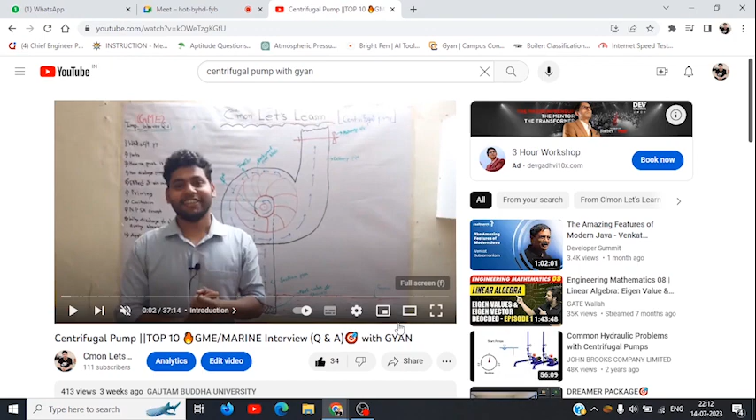So guys, we were talking about the NPSH concept, and he was confused about what he should understand, but he is facing a little problem - what he will say to the interviewer so that he will be satisfied. Is it, Vibin? Yes bro, okay, no worries.

Here in this section, after method of priming, I have explained what is cavitation, why it happens, what is vapor pressure, and the concept of boiling. Now Vibin, once again, what is cavitation?

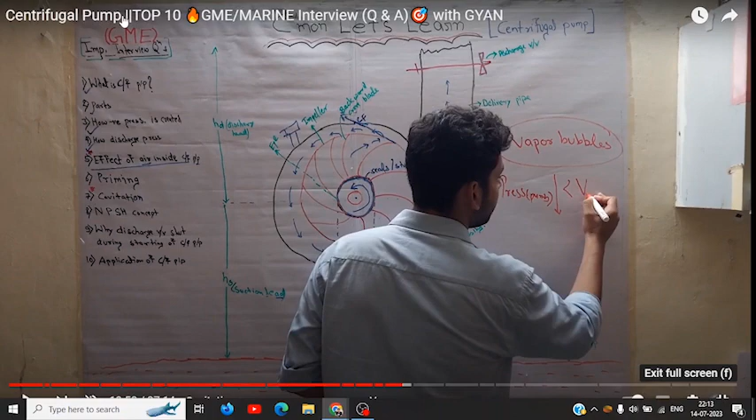Cavitation means the formation of vapor bubbles, due to when the pressure of the pump gets below the vapor pressure of the liquid which is being pumped. So at that time the vapor bubbles start to form. Correct, very correct, okay.

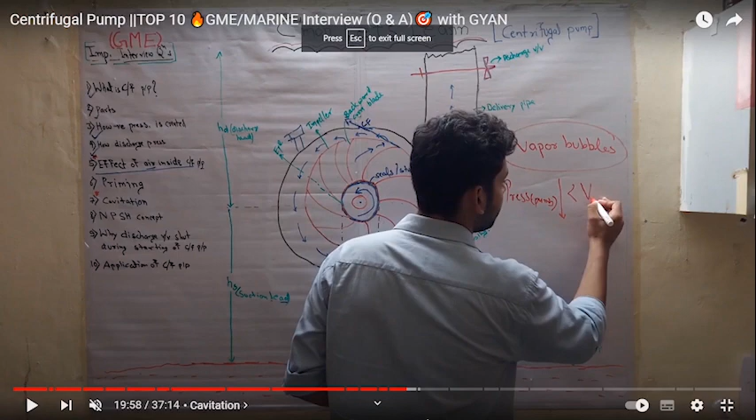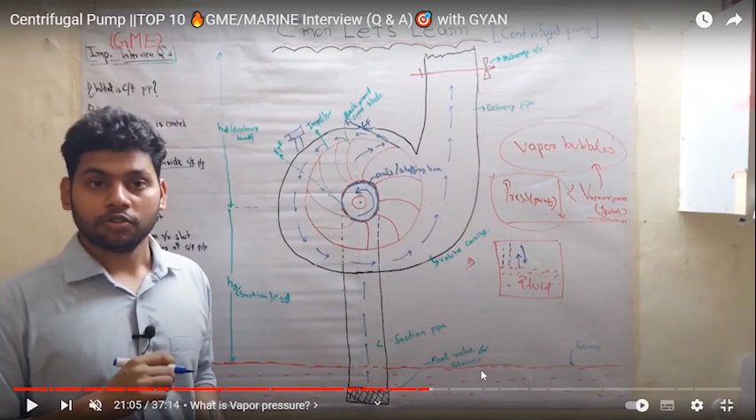In that, you just said the vapor pressure of the fluid gets more than the pressure in the pump, or pressure in the pump got lower than the vapor pressure of the fluid. So what is vapor pressure of fluid, can you tell me? The vapor pressure means the force which is exerted by the vapor state when we are boiling it or heating it.

Okay, means when we heat the liquid, or when there is a liquid, there is always evaporation and condensation, because evaporation doesn't only happen at boiling point. It can happen at any temperature. If you heat it, the vapor formation becomes more. Yes bro, okay, all right.

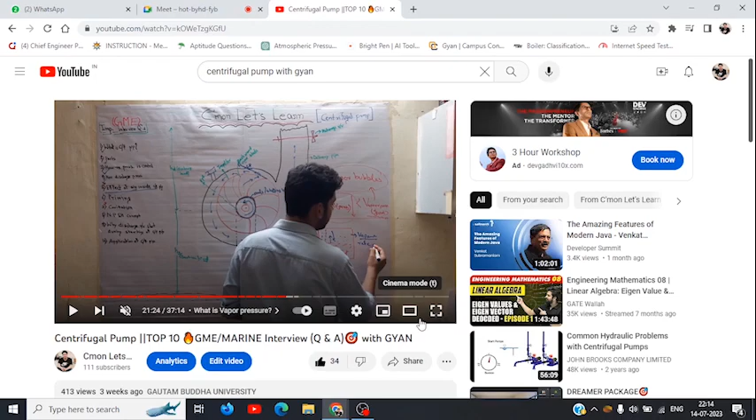Now we will firstly understand what is vapor pressure, and after that the concept of boiling, and then the NPSH concept - you will understand why the NPSH concept is really needed to know.

Okay, now let me explain it by figure. Now see here, everyone, this fluid is in a container. You people, when you go through my videos, I have explained this. This is one of the most important videos. Now see this fluid again.

This fluid in a container must be evaporating also, and due to that there will be some vapor formation, and this vapor will be exerting some force on the container. Is it so or not? Yes, bro.

And this vapor, the pressure due to the fluid, the vapor pressure is the pressure which is exerted by the fluid. Now, when do we say this is the vapor pressure? So there will be evaporation, and at the same time there will be condensation also. When the rate of evaporation and the rate of condensation become the same, there will be some equilibrium established, and then the pressure exerted by this vapor of the fluid will be known as vapor pressure.

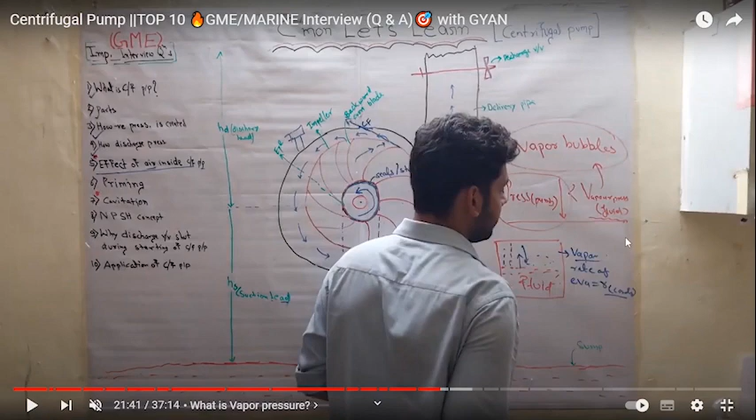So vapor pressure is that pressure which is exerted by the vapor of the fluid at the time when the rate of evaporation and rate of condensation become the same, that is, at the time of equilibrium establishment. Now understand what is boiling point. The next topic is what is boiling point.

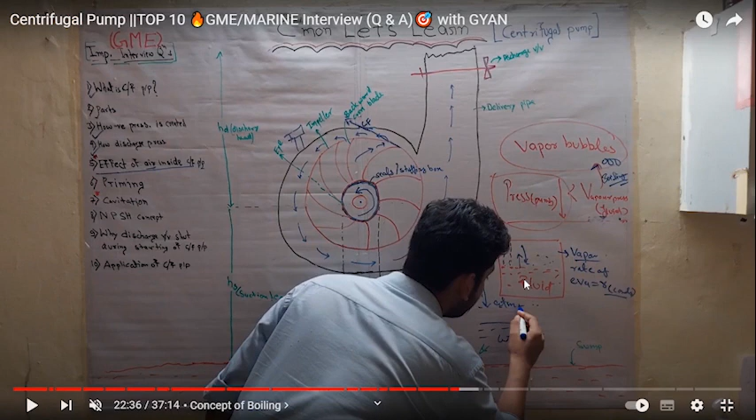Now when fluid boils, when fluid forms vapor, vapor bubbles form, because evaporation is a very slow process, is it or not? Evaporation and boiling are not exactly the same thing. In both cases it gets converted into vapor, but in boiling a certain temperature is needed, while in evaporation any temperature will convert a fluid into vapor.

Now understand the concept of boiling - why does liquid boil? Before I explain, would anyone like to explain why liquid boils? Like how liquid boils - what is the mechanism of how liquid boils? Anyone, guys? Sarfraz, any idea?

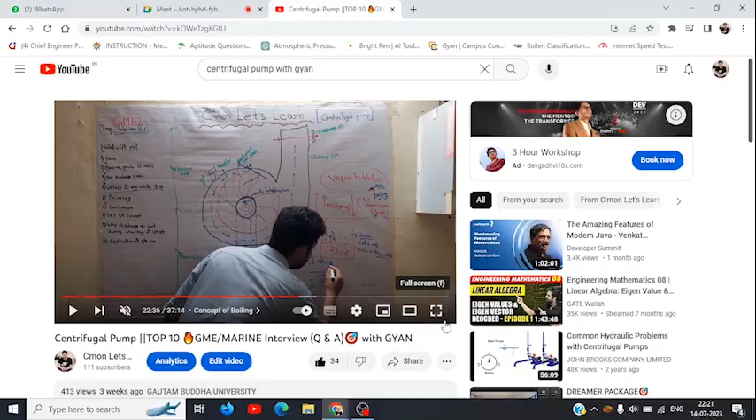Okay, what actually happens? How does liquid boil? We know the liquid boils at a certain temperature. Now, what will happen at that temperature? Suppose this liquid is water. We start heating it up. Now we have the liquid and the vapor here, and the vapor must be applying some force to the surface of the liquid, is it or not?

Now understand it in an open atmosphere. Here we have atmosphere, okay, atmospheric pressure. What is the pressure of atmosphere? It's 1 atm, 1 atmospheric pressure, 1 bar pressure nearby. So from the atmosphere on the fluid surface it will be exerting 1 bar pressure. The atmosphere will be exerting on the fluid 1 bar pressure, and when we heat this fluid, the vapor pressure of the fluid starts increasing.

This vapor pressure of the fluid starts increasing, and by the time it touches 100 degrees Celsius, it overcomes the pressure of the atmosphere. This vapor pressure of the fluid becomes greater than the 1 atmospheric pressure, greater than the 1 bar pressure. One force is the atmospheric pressure force, that is in this direction, and one is the vapor pressure force, that is in the above direction.

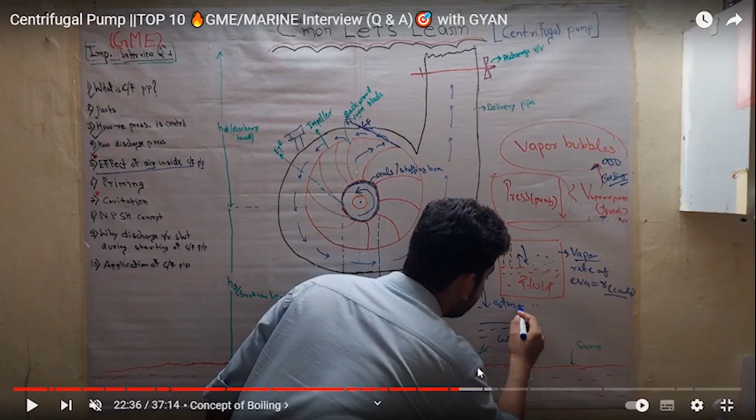Okay, here we have surroundings and these things. Now what happens in a pump? What happens, why? What is cavitation? And why we have the NPSH concept? Now understand this.

This is the fluid, okay, forget about atmosphere because the fluid is in the pump. Now consider this analogy: equate atmosphere with the pressure of the pump. Got it? Now the liquid will be having its vapor pressure, and the pump will be having the pressure of the pump. Like the atmospheric pressure will be equating to the pressure of the pump.

Now whenever the pressure in the pump decreases below the vapor pressure of the fluid, or say when the vapor pressure of the fluid overcomes the pressure of the pump, then the liquid starts boiling, it forms vapor bubbles, and this is nothing but cavitation. Got it, guys? Yes, bro.

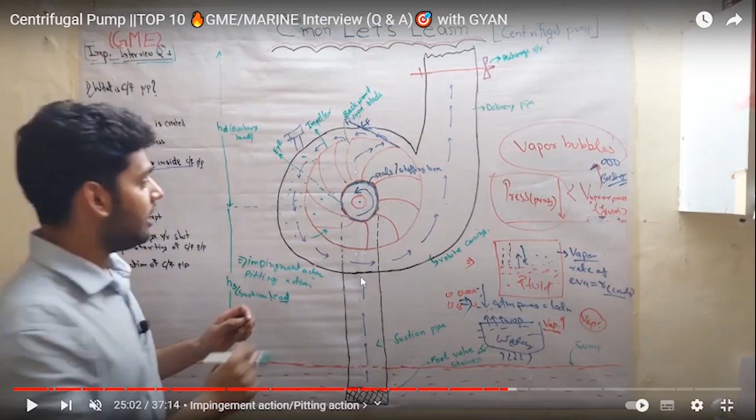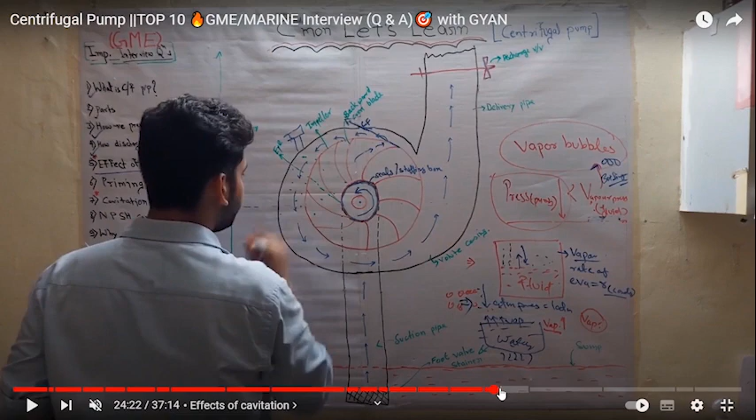Okay, so this is it. And what does cavitation do? I have just explained the effect of cavitation, impingement, the effect of cavitation. Here the effect of cavitation you will get to see. What is impingement action? I have also explained.

And now how can it be prevented? The NPSH concept comes to prevent cavitation. Now again I want Vibin to explain what NPSH is. From his explanation I will take out some words and tell him what actually the interviewer wants to listen. Yes, go ahead Vibin.

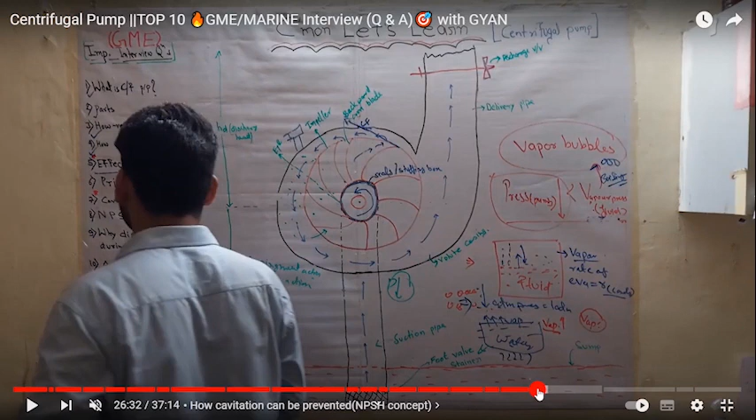What is NPSH, bro? NPSH means net positive suction head. It is the minimum pressure which is required at the inlet of the pump to avoid cavitation. So this minimum pressure should be above the vapor pressure of the fluid.

Otherwise, if the vapor pressure of the fluid overcomes the pressure in the pump... that is just an analogy, we are not talking about atmospheric pressure here, it is the pressure in the pump. When this vapor pressure of the fluid overcomes the pressure in the pump, then it will start boiling. So we ensure that this NPSH level should be greater than the vapor pressure of the fluid.

So if the interviewer asks what is NPSH, you should say NPSH is net positive suction head. It represents the amount of pressure at the inlet of the pump which is supposed to be above the vapor pressure of the fluid, or it is the minimum pressure required at the inlet of the pump.

Got it guys? Any confusion? No bro. When you go through the videos you will get more clarity.

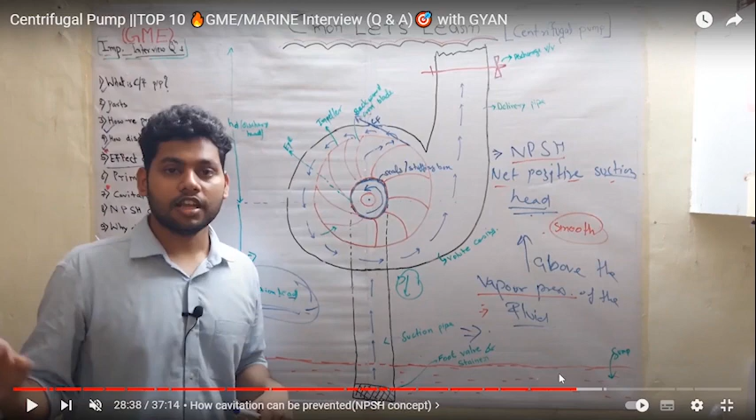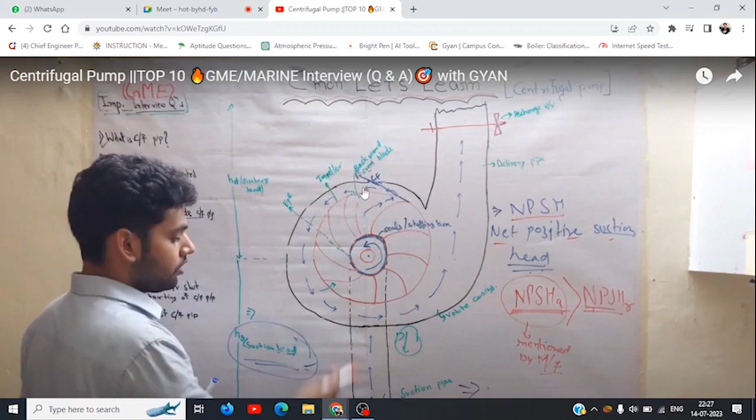Now, I will mention one of my mistakes, a minor mistake I made. I said that the NPSH available should be greater than the NPSH required, to avoid cavitation, which is correct. But I mentioned that the NPSH available is given by the manufacturer - that part is correct, the NPSH required should be above a certain value, and NPSH available is calculated, which you need to ensure is above the NPSH required. This quantity, NPSH required, is mentioned by the manufacturer.

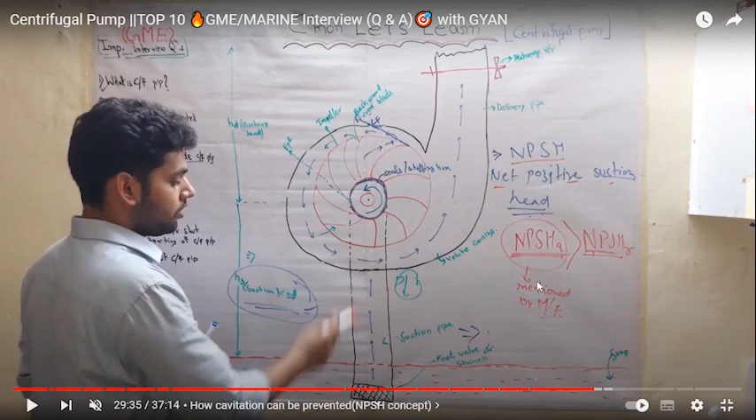I made a mistake by accident, and in the pinned section I noted it so everyone could notice the mistake I made. Pardon me guys, please take note of one of my minor negligence while explaining the NPSH concept.

By mistake I said the NPSH available is mentioned by the manufacturer, but the truth is the NPSH required is mentioned or given by the manufacturer, whereas the NPSH available is calculated. Clear? Got it, Vibrant?

Yes bro. Okay, thank you for your time. Thank you for your time bro, to explain it. Okay, you're welcome. Thanks Evito.

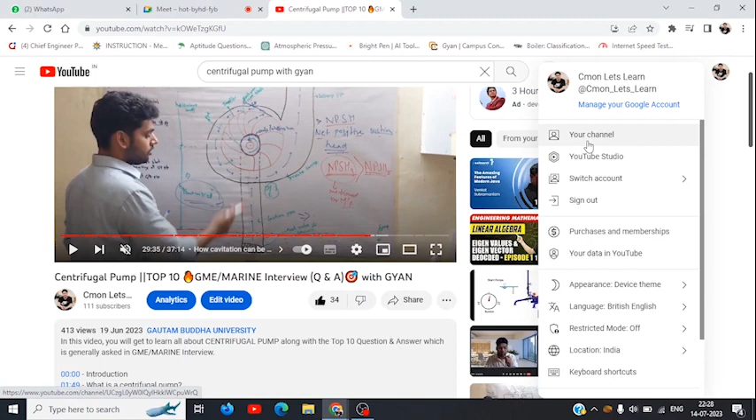And guys, go through that video - this is what I have tried to explain. Now some people were asking what exactly we should say to the interviewer so that the interviewer will be satisfied. Someone was asking about the wording also.

So I have collected the top 10 questions, mostly for Anglo-Eastern, and since knowledge is universal it will help you in other interviews, other college interviews also. I have explained every one of the top 10 questions exactly the way I explained them in my own interview. Got it guys? When you go through this video, you will understand it.

You can also go through my interview experience as a GME, from the start of my career when I chose to join merchant navy, until the end when I got selected. I explained everything - every struggle, how I used to prepare, how my English was worst, how I was a shy person, how I was fumbling - everything I have explained. It's a long audio, not a video, because video wasn't recorded back then and we weren't aware of that.